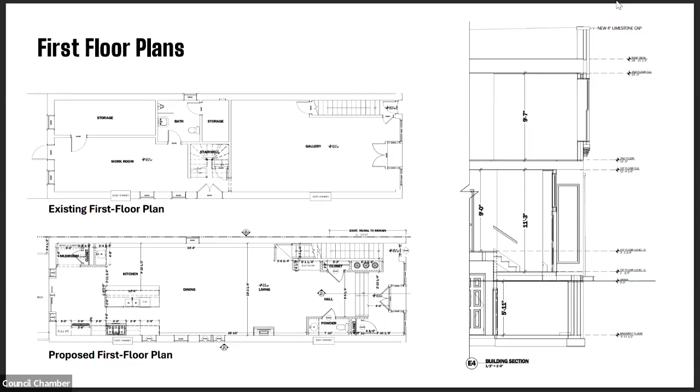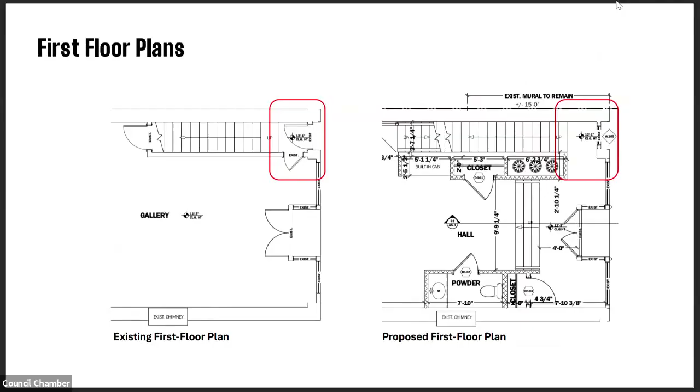Staff recommend that replacement of the door with a fixed panel will not remove any decorative features or craftsmanship important to the period of significance, and the design of the proposed panel will preserve a record that the opening was originally for a door, even if it's no longer operable.

In addition to the changes to the front facade, a new roof deck is proposed with an access stair, and new masonry openings are proposed at the side elevations. Due to the narrow side yards and the height of the adjacent buildings, these changes will not be visible from the public way.

Staff recommend approval of the project as shown on the drawings dated 1/29/26, with the condition for review of the new brick at the parapet as mentioned earlier.

Alderman Knudsen has reviewed the proposal and has no objection. The architect, Samuel Pavlovchek, and a representative for the owner, Alex Holt, I believe, are present and available to answer your questions.

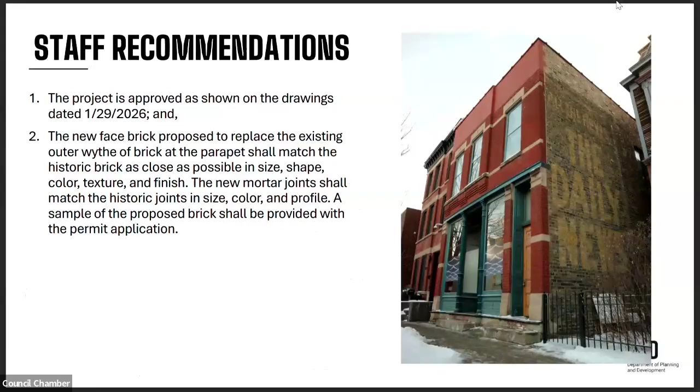Commissioner Fair: I think I heard you say it, but just wanted to confirm, for the new roof access for that pop-up, is that hidden from view by the adjacent building? Tyler: Yeah, and it's just limited to access to the roof, so even if it was visible, policy would allow it, but basically everything behind that front chimney is not visible.

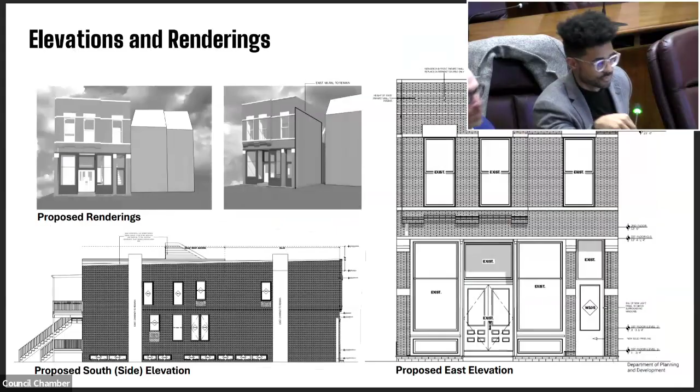Okay, and we've confirmed that. That's good to know, thank you. Thank you, any other questions, commissioners? And Commissioner Rubin.

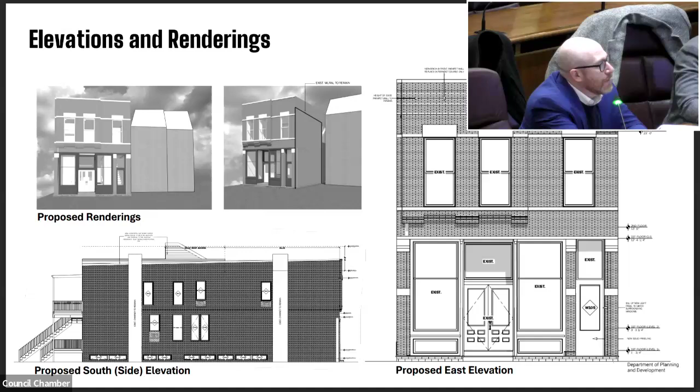Sure, that's fine. Hi, I think you mentioned, I don't know if you mentioned the cornice. I noticed the building next door had a nice little cornice on it. Did this originally have one on the parapet?

Yeah, so it had a pressed metal cornice that was removed before, and the area behind it was parged over before Roger Brown bought the building.

And anecdotally he wanted to bring it back, but there's a couple of options here. If a cornice were to come back, we would approve that as well.

Got it. But replacing the very clearly poorly matching brick is still one thing to address, right? Yeah, exactly. Sounds good, thank you. Good question. Any other questions?

If there are none, let's hear from the project architect if they're here.

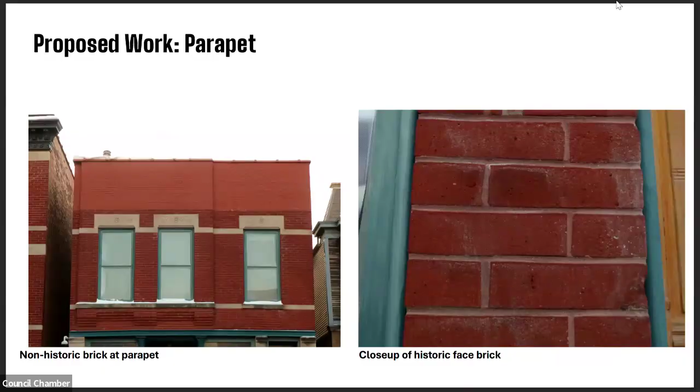Hi, good afternoon. Samuel Pavlovchik from Pavlovchik Architecture. I think the case was really provided in full. We were really trying to limit the amount of features that were changed in the building while still utilizing the best space within. The roof deck and access, again, were intentionally designed to be pulled back.

Even the roof deck itself does not extend all the way to the front parapet wall, so it's held back. So we don't need to worry about any new increase in height to the parapets.

Same thing with the residential first floor and the mention about raising up that floor to better utilize the basement space. We pulled that first floor in at the existing floor level so the entire existing front facade can remain while still making it usable space in the front and then being able to further utilize the basement below. Otherwise, I think everything else was pretty well covered.

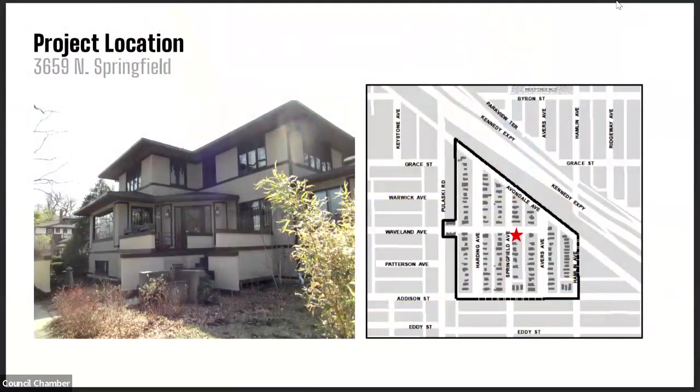Okay, thank you, Mr. Chairman. The subject property includes a prairie-style main house and is located on a corner block at Springfield and Waveland Avenues. The current two-car garage was reviewed and conditionally approved by the Permit Review Committee in 2021. The applicant has applied for a permit to remove and replace the front stair, porch, and wing walls and the 4 feet 6 inch high garden fence along the sidewalk. They are made of wood frame construction.

The deck and stairs are finished in wood decking. The walls are covered in beige cement stucco with dark brown stained wood trim. The deck is rectangular in plan with narrow stairs that go down to grade, and these elements have been designed and constructed in the same materials and architectural styles as the main house.

According to the architect, the existing decking and framing support is rotted and supported on inadequate foundations. The wall sections are damaged and have settled unevenly, causing chronic cracking, especially where they join the stucco walls of the residence, thus allowing water to damage both the deck and the house. The architect did consider just repairing the deck and stairs; however, in their opinion these problems would just continue and the settling issues would persist. Replacement would be required to install new adequate concrete foundations below, constructed with joints that allow for differential settlement.

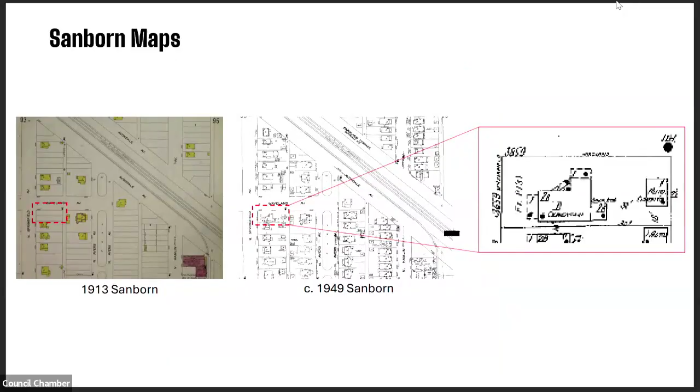In order to determine when the stair and fence were installed, staff researched documentary evidence of the property. The Sanborn Fire Insurance map from 1949, shown at right, shows a shallow porch and diagonal stair parallel to the angled entry. Historic photos with an unknown date but likely taken prior to 1975, based on the style of the street signs, show the diagonal stairs. In the 1975 photo, the stucco garden fence does not appear to exist, but the diagonal stairs do. A photo taken in 1978 still shows the angled porch, and all the photos mentioned, on that top row, were taken prior to the Villa District designation in 1983.

The Chicago Historic Resources Survey card has photos taken in 1997 and 2007, showing the current stair configuration and stucco garden fence. Staff was not able to locate permit records or other documentary evidence between 1978 and 1997 to determine when the stair was changed or when the fence was installed. Therefore, there is a chance that the current stair and fence were constructed after the district designation.

The architect documented the existing conditions of the stair and fence as shown on the permit drawings, and the proposed replacement will match the existing in design, size, materials, and location. The design and materials of the current stair and fence, while not original to the house, are consistent with the prairie-style main house. Staff recommend that the proposed removal of the existing non-historic stair and fence and replacement in kind will not have an adverse effect on the property or district as a whole.

The design, size, location, and materials of the proposed new stair and fence are compatible with the architectural features of the main house, and staff recommends approval. Staff recommend that the color and texture of the stucco on the new stair and fence should be compatible with the stucco of the main house.

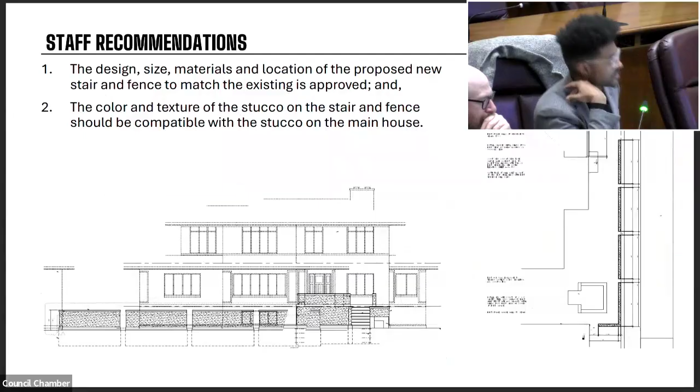Very good question, clarification. Any other questions? Seeing none, let's hear from the project team. The project architect, I believe, is here, Jerry McManus.

Good afternoon, Jerry McManus, Lineworks Limited Architects, the architect for this project. I think the presentation was pretty comprehensive. There is one item I would like to point out.

As best we can tell from the survey, that four-segmented garden wall or fence, whatever you want to call it, appears to be built either on or over the side property line. So bringing that down, the replacement, of course, would actually be built within the property line. I noticed there was a sentence in there about maintaining the same location, and I just want to differentiate there that we would be making a change there.

Otherwise, the owner's desire is to restore exactly what's there, the way they bought the home 6.5 years ago, and they'd like to make use of both the fence and the deck and the enclosing walls. They're perfectly happy to make it as compatible and matching to the existing residence. That's very important to them too. But the fact is that outdoor elements like that suffer in the weather and do need to be repaired or replaced every so often. So that's what we're hoping to do today.

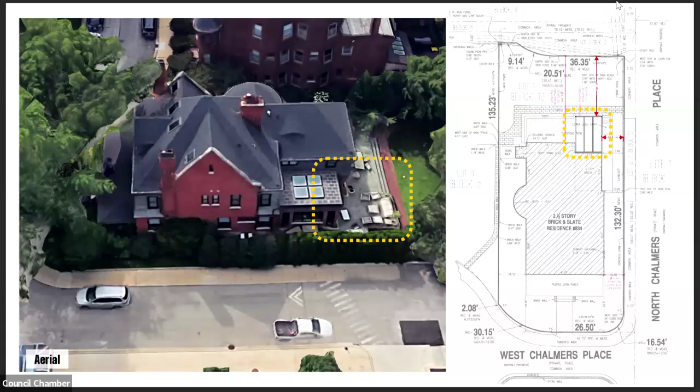There's an existing low masonry terrace at the rear of the building, which was expanded eastward when the addition was built. So now the applicants plan to add an open metal pergola onto the terrace, approximately 20 feet wide by 10 feet long.

So the new pergola will primarily attach to the non-historic rear addition, just below the eaves of the roof and the masonry terrace. It's proposed to be 10 feet tall from the patio and 12 feet 2 inches tall from grade, made of pre-finished aluminum in a dark color.

This pergola does not detract from the historic character of the property or district and will not damage or obscure any historic material or significant historic features. And because of that, staff recommend approval as proposed.

A letter of support from the Seminary Townhouse Association was also included in your packet, and I believe we have the homeowner here, Ned, if you have any questions.

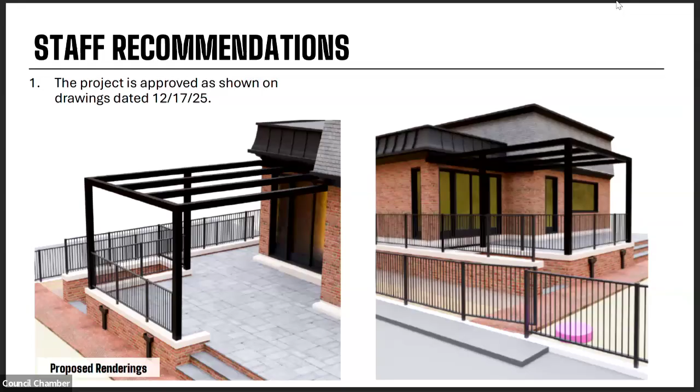Welcome. I'm Ned Villers. We've owned the home since 2013 and lived there since 2010. For those of you who know our community, it's its own landmarked district with a strict process that we have to go through to do anything. In this case, we've done that, and everyone is supportive and has no issues with it, so we hope you'll see the same.

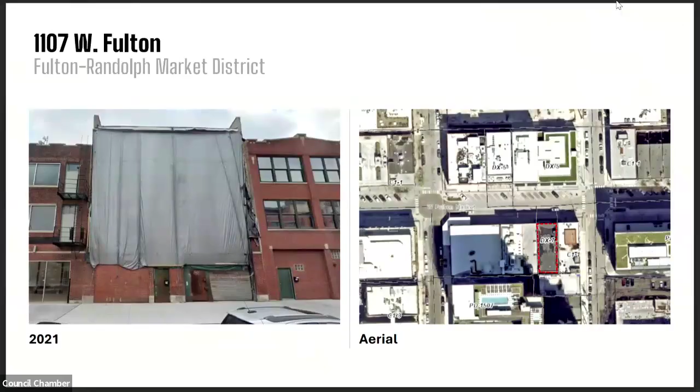Thank you, Mr. Chairman. The building is located mid-block on Fulton between May and Aberdeen Streets. The Fulton Randolph Market District, designated in 2015, conveys Chicago's importance as a wholesale market and meatpacking area that includes a significant number of manufacturing, warehouse, and meatpacking buildings that exemplify the importance of industry to the city's economic development.

The majority of the buildings were designed with a utilitarian aesthetic that placed priority on functionality, sturdy construction, minimal wasted space or material, and clearly expressed structure with the use of large windows, vertical piers, thick masonry walls, and limited architectural ornamentation. The subject building is located adjacent to 2 to 3-story buildings.

The front facade was demolished prior to the initiation of landmark designation of the district. Since the existing building has lost its historic facade and no longer conveys the historic and architectural character of the district, the subject property was identified as non-contributing. The proposed changes therefore should be reviewed pursuant to the criteria for new construction, additions, and alterations to non-contributing buildings and the Fulton Randolph Market District design guidelines.

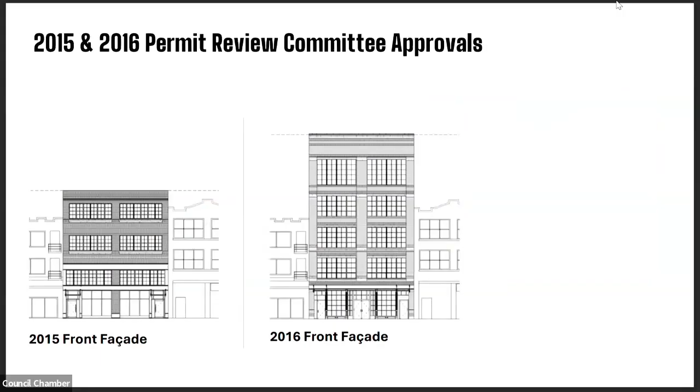Facade replacement projects were reviewed by the committee 3 times before, in 2015, 2016, and 2022, but none of the work moved forward. The 2015 proposal was a 4-story building with 2 bays and an overall building height of 49 feet. The 2016 proposal was for a 5-story building, also with 2 bays, but an overall building height of 70 feet 5 inches, though it was conditionally approved to have the fifth floor set back so the massing and scale of the building is more compatible with the historic context of the district.

The most recent PRC-approved proposal in 2022 was for a 4-story building with 3 bays and no additions, shown at left. Historic preservation staff reviewed and approved the permit drawings in December 2022. However, that permit has since been voided.

Sometime between 2022 and 2025, a structural steel frame was constructed on the front facade, which includes 2 columns on each side and 1 center column. This 2-bay layout does not match the 3-bay layout that was approved for permit.

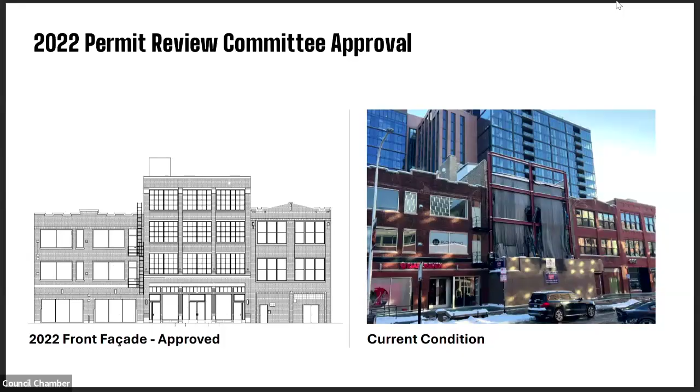Historic preservation staff reviewed permit drawings for this project in July 2025 and issued corrections recommending how to revise the design to meet the Commission's criteria for new construction and the Fulton Randolph Market District design guidelines. In December, the drawings were resubmitted to Landmarks for review. Staff issued corrections reiterating the same comments from the last review cycle, and noted that since the design is significantly different from what was previously approved by the PRC, it would need to be reviewed again at a future meeting. Since then, staff has been in contact with the property owner, who has ultimately decided to present his project as proposed with no changes to the committee for review and decision.

The current proposal is a 4-story building with a 3-story addition. The building height from grade to top of parapet of the principal facade is approximately 52 feet. The overall building height from grade to the top of the penthouse roof is 94 feet, and 104 feet to the penthouse machine room. The proposed floor-to-floor heights are 15 feet 9 inches for the first floor and 12 feet for the second, third, and fourth floors.

The front facade is proposed to incorporate 2 bays with 16-foot 4-inch wide by 9-foot 4-inch tall windows on floors 2 through 4, with a narrow masonry pier in between. The new windows are proposed to be divided light steel windows with operable awnings. The scale of the window openings is larger than what is found in the historic buildings in the district, and staff recommend reducing the size of the window openings to be more compatible. This could be accomplished by raising the sills and widening the vertical masonry piers. Alternatively, the front facade could be divided into 3 bays as previously approved by the PRC.

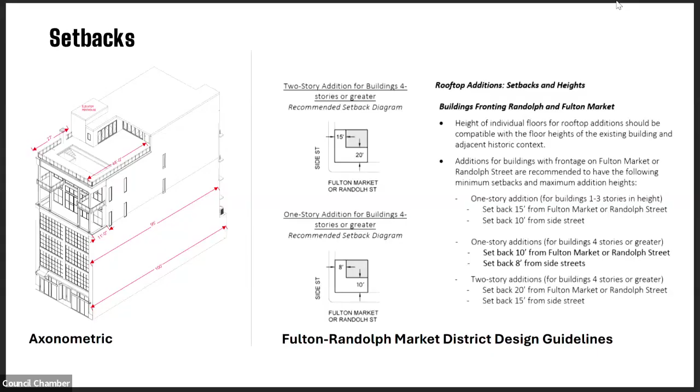The Fulton Randolph Market District design guidelines provide flexibility to add space through rooftop additions. Buildings that are 4 stories or greater may have a 2-story rooftop addition constructed, provided that they are set back from the primary facades along Fulton a minimum of 20 feet. These setbacks are intended to maintain the scale of the immediate context and overall district. The height of the individual floors of the rooftop addition should be compatible with the floor heights of the existing building and adjacent historic context.

To support the proposed building height, the applicant provided several addresses and their estimated heights of taller buildings within the district, which were all included in the packet for your review. In summary, a number of these properties are located on larger sites that are not comparable to the subject property. There are several properties of similar context, such as 1106 West Fulton, a new construction project approved to be 5 stories at 66 feet high by the PRC in 2019, located mid-block with a 50-foot street frontage and directly across the street from the subject property, making it the most relevant in context.

215 North Aberdeen is a 5-story contributing building at 77 feet high, located mid-block about a block away from the subject property. 1114 West Fulton is a 4-story contributing building at 51 feet high, located mid-block. And 312 North May is a 6-story contributing historic building at 88 feet high that fills half of the block, located about a block away from the subject property.

The new construction examples provided were approved by PRC but have different contexts than the subject property, as they have a larger footprint and are located on a corner lot, making them not comparable to the subject building. This includes 1045 West Fulton, which was approved to be 12 stories high at 138 feet by the PRC in 2019 and was part of a larger development that filled half of the block.

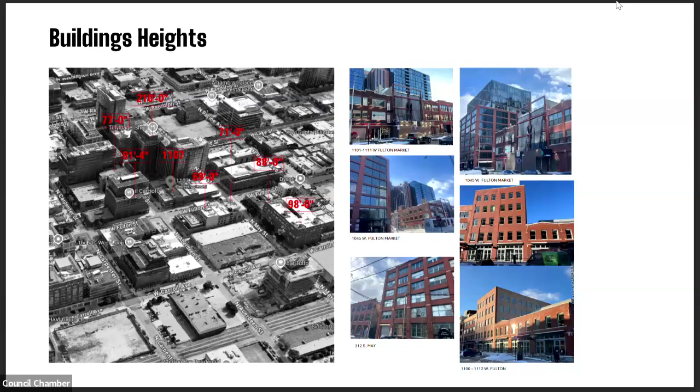The last example provided by the applicant is 1118 West Fulton, a 5-story building at 71 feet high, located at the corner of Fulton and May Streets. However, this is a non-contributing building, so we cannot take that one into consideration.

Taking all this into account, the scale of the immediate historic context of the contributing buildings is important to maintain. The proposed floor-to-floor heights of the addition, which are taller than the other floor-to-floor heights on the building and context, the setback of the 3-story addition, which is not consistent with the district guidelines, the open structure and projecting balconies proposed at the 5th and 6th floors, which are not characteristic of the district, as well as masonry opening sizes proposed on the 2nd, 3rd, and 4th floors of the primary facade, are not compatible with the historic character of the district.

Staff recommend options that address these issues, such as a 4-story building with a 2-story addition set back a minimum of 20 feet from the front facade and individual floor heights compatible with the adjacent historic context, or a 5-story building that does not exceed 66 feet in height with a 2-story addition set back a minimum of 20 feet from the front facade and individual floor heights compatible with the floor heights of the adjacent historic context.

These proposed options would provide the number of stories in building height that are compatible with the immediately adjacent context and would be in keeping with the historic and new construction examples provided that are similar in scale and siting with the subject property.

The front elevation of the 5th and 6th floors is proposed to be fully glazed, with side elevations clad with metal panels. Staff recommend that any cladding materials on the rooftop incorporate the color of the window frames, and that metal panels be a dark neutral color with a matte finish that recedes into the background.

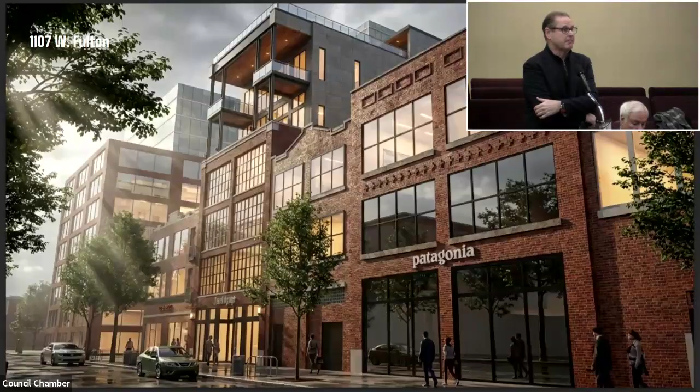So the idea is, you can see that it emphasizes the parapet line across the street of West Fulton. And the idea with the steel was that it minimizes the design and kind of retracts back. If you look, there are 4 steel columns going up that are maybe 12, 14 inches wide, so it's a very minimal structure.

It does get reinforced, as Joyce said, with the balconies and that top parapet. And we would obviously work with, as one of the comments was about the railing on top, to make that disappear. Similar to what we did on the fifth floor, that parapet acts as a railing.

So the floor is a little deeper in there, and that's why we came up with some of those larger floor-to-floor heights, as well as the sixth floor floor-to-floor height, because there are structures on the roof that we needed about 4 feet deep for. So while it might come off as 15.9, the real dimension inside is 12 feet, which is very typical in that district.

So I think that follows the design. I'll just go through a little response on the comments. Our goal really was to fill in the site with a modern interpretation of the Fulton District kind of industrial building. Those large windows, those 2 bays, we did look at a 3-bay system, but it actually reinforces the verticality of the building as opposed to horizontal.

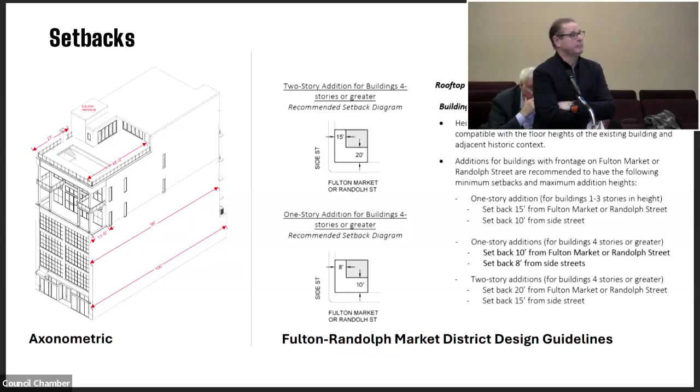But like anything, we could keep looking at things and always try to refine it. I mean, that's what we're doing here.

I have a question just for dialogue. Commissioner Fair, are you saying that maybe an acceptable approach would be to expand the street wall, not let it look like balconies up there, but take the street wall all the way up and go for the mass, versus two different approaches? Right now, I think what gives pause is that it looks like an old historic structure with a non-conforming addition.

Yeah, absolutely. Right now it's like a complete form, but it could read as new construction working within the guidelines—a true street wall—versus looking like an addition to a non-conforming structure. Yeah, I think we're on the same page.

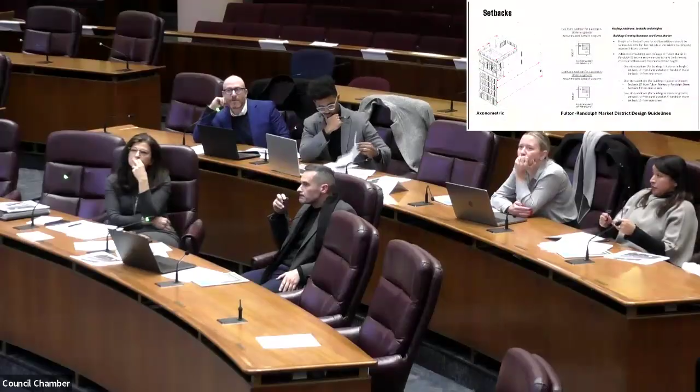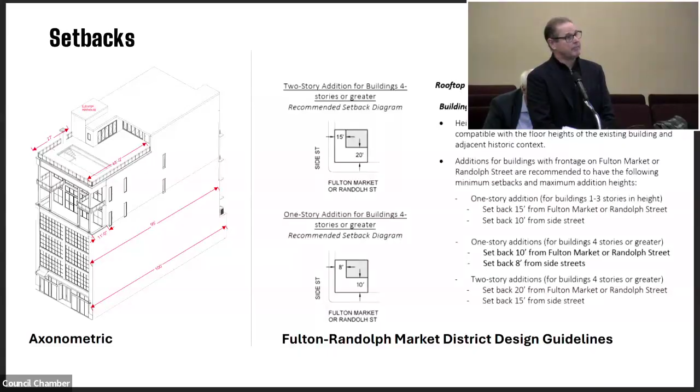About damaging the buildings next to it by taking down what remains of the historic structure that isn't visible? Yes, they're built like common walls—I think this building was there first, from what I remember looking back. So the two party walls are integral to the adjacent buildings. You'd have to take them down and build them back in sections. On the sidewalls, the rear wall has to come down, and the front facade's already gone. So the masonry on those two common walls comes through, but we'd have to redo the face brick, obviously.

But that would still bring it back to the permits review committee. Even if it was all brand new construction, it's still in a historic district, regardless of whether there's pieces of the original building there or not. It wouldn't end up sidestepping this commission. Right, okay, right.

I don't know that I have a solution here, but just addressing the massing at the front - I think what you did ends up being the reverse. It's drawing attention to the volume that's there. The wall isn't apparent, so you end up with the beams and the balconies, and even though it does break it up, what you're noticing is the void of space, which acts like an existing building because you've built lines around it, which ends up being distracting from what you're doing. It would stand out as a non-compatible addition no matter which way you do it, which is concerning. What is the square footage of the two?

Is it 2 or 3 residential units in the addition? It's potentially just one residential unit. That's all one residential unit? Yeah, okay. But we've looked at it both ways - in the permit we went in as 2 units, but it potentially is going to be for 1. I don't remember the net square footage, but it's 40 by 80, so minus I think it ends up being maybe 38, without the use of the 2 floors.

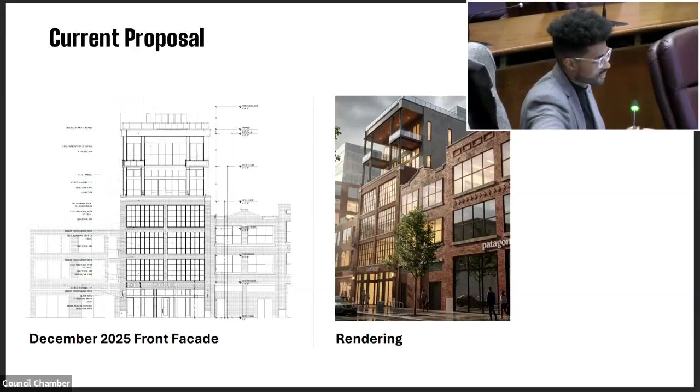Anyone else? You have additional questions, or we could go to public comment and come back to discussion? It was just more discussion. Okay, I mean, I feel like we're trying to talk our way through this, right? There's no... so we can say no comments. We're in discussion, yeah, okay. Unless - we have no public comments. There's no public comments, we're in discussion.

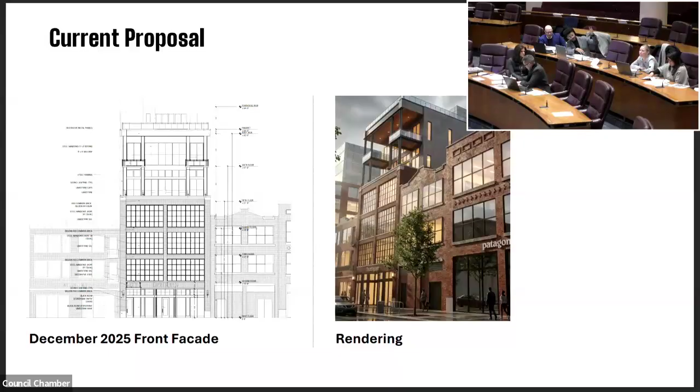Our primary responsibility isn't so much with the amenities of the building, although we acknowledge and are sensitive to that, and we know you want to make something attractive that offers all those sorts of things. But I look at this as a puzzle, and the pieces are set - one of the constraints is the treatment of those two upper floors. One option identified is at the corners facing the main street: do you build those up so it reads more solid and not like a completely foreign add-on that's been dropped on it? Or are you able to cut back those balconies and that structure so it steps back and reads more in line with additions to that building? I'd like to see a solution go in that direction.

I think it feels like we're in a bit of a stalemate right now. And I hear the restrictions or challenges you all have, but we really want to make sure we're not introducing something that's not in alignment with everything else in the district. Even the example you shared is what we're trying to push you all towards. Well, I mean, it's steel, glass, brick.

That's essentially Fulton Market, so I guess what I'm reading in what you say is that it's the use of it that's potentially pushing it in different ways than it's there. But I don't know about that - I feel like it's very deliberate to that neighborhood, it wouldn't be in probably any other neighborhood. I think the material palette, absolutely, is in kind. I think the use though, particularly where we're not in alignment, is that the steel at the upper two floors is argued to be creating a step-back effect. We're saying no, that mass reads, especially with those balconies and that concrete balcony projecting out - it just reads as a solid mass.

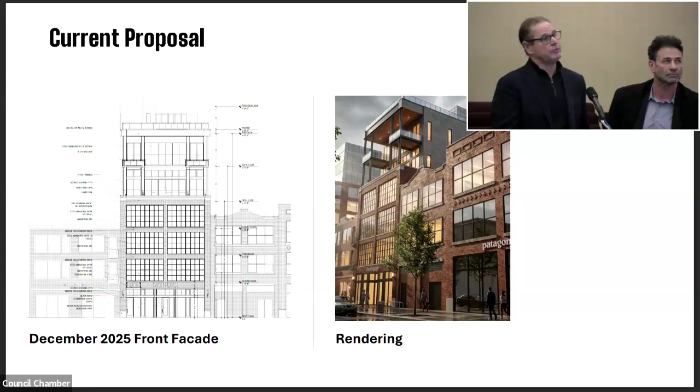It's interesting to look at that from that perspective. If you add mass and solid to it, does it actually help the top two floors? I think Eamon wants to say he's the owner.

Hi, my name is Eamon Hamid. I'm the owner, and thank you all for taking the time to review this. Thank you, Joyce. I've owned this building a long time.

I think John has done a nice job trying to incorporate what your guidelines say: don't imitate, but come up with something creative that blends in without imitating what's there historically. I feel, and a lot of the community feels, that this building does exactly what it's supposed to do in that area. It incorporates the industrial meatpacking look with steel, panels, and glass of the district. The district has evolved, and we now see buildings that are creatively and architecturally beautiful while also fitting the neighborhood. A lot of new construction follows that design, following the guideline of not imitating but complementing. I think the first floors do that, and the addition does as well.

Everybody's saying how heavy it is or this and that, but I think a straight-up building would look terrible. If I were on the commission, I wouldn't want something just coming straight up. I think the steel that goes up shows the meatpacking district's look, but also lets your eye go through it instead of hitting your face with a blank wall.

318 North Carpenter does the same thing. Now it's a bigger building, bigger footprint, but with the zoning we're allowed to do this. This is what we got the zoning approved for, as Nick said.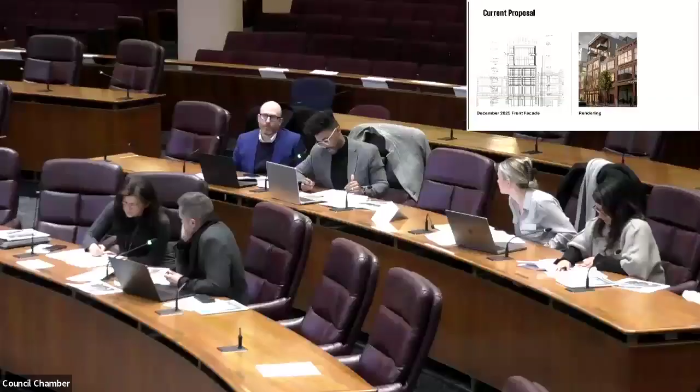Does that make sense? Yeah, the 5th and 6th floors, I believe, are about 15 foot 6 inches for floor-to-floor heights, whereas the 2nd, 3rd, and 4th floors are 12 feet floor-to-floor. So the first thing I'd say is getting the 5th and 6th floors' floor-to-ceiling height in alignment with the 1st through 4th floors.

Yes, while also meeting the overall building height requirement for the street, which was 66 feet. So they're doing that technically already, unless they change the design further on and it all becomes a single wall at the front, at the property line, I should say. That makes sense.

The 66 feet - well, I guess what's the 6-story height currently? If we look at the 6-story height, what's that currently? 82 feet, or really 84 feet to the top of the parapet. So that's quite a bit of reduction. Is that to the penthouse? The penthouse is 94 feet, but the penthouse is set back.

So what we're talking about in terms of height is connected to the design of the building. Our feeling has been that those balconies, those four columns, all read as a mass contributing to the street wall. So the next part of the recommendation would be that has to be revisited, to either be redesigned as a full setback - does that 11 feet get chopped and you rearrange the amenities as such - or if the entire street wall reads more consistent for all 6 floors, then you've got the question of how you adjust the entire floor-to-ceiling height for the building to get within that 66 foot overall height, which I don't think would make anybody too excited about how you now squish 6 floors into 66 feet.

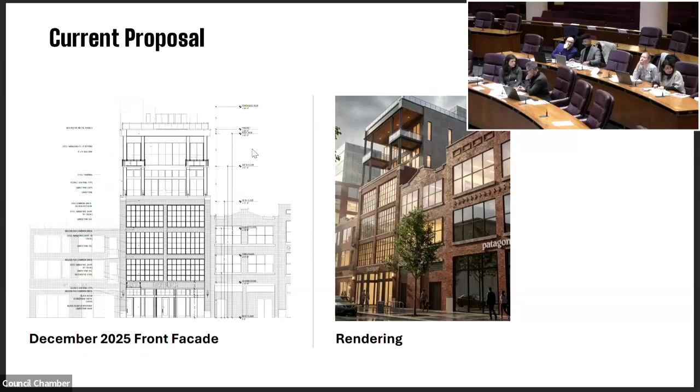Understood. There's also, regarding the heights, a little misleading thing I mentioned - there's some interstitial space on the roof deck that looks like it's another 4 feet higher. Is there a couple feet? Obviously that's an easy fix, probably.

Is the commission saying to bring up the sides and leave the front like it is? I'm open to doing that. I'm not looking to do anything you don't want - I think you suggested strengthening up the sides so they go straight up. I'm fine with that, bring that forward. And if you feel like that doesn't work, I'd be more than happy to do that.

I'm working with the architect to see if he's okay with that, but there's a building at 318 North Carpenter that does just what you're describing - just as tall as this, sits next to a 2-story historic building, right abuts to it, and does exactly that, except it takes the recommendation of putting up the sides straight up and leaving the front open. It's 318 North Carpenter.

I don't even think it has to be solid. Something needs to happen, because the structure is quite prominent - those columns break away from the rhythm of the 1st through 4th floor, so there's something different happening if that rhythm continues.

If we could look at that as a solution, I can work with the architect, or let him work on it - I think that's a very good solution, especially if it can be some kind of material that isn't just solid, like windows or something like that.

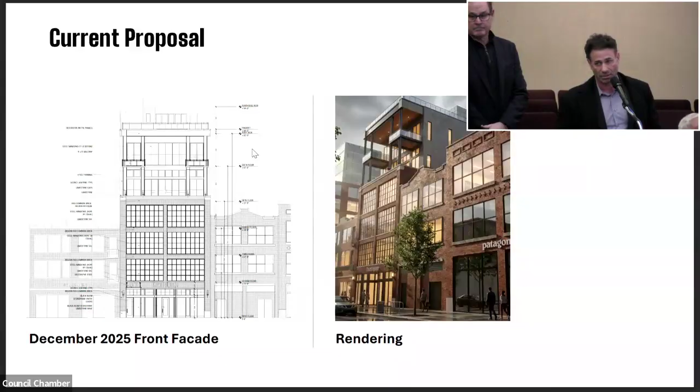I think the execution of how that's done is something we would definitely want, if not us, the staff to be able to review. That we will see.

Who wants to try to summarize that? That's a succinct recommendation. Yes, please, thank you. I will attempt, and you could correct me.

We need to modify the staff recommendations. The project does not need to come back to the commission, but there will need to be some adjustments to the design that would be reviewed in consultation with Commissioner Fair as soon as possible, so there's no delay in your permit process.

Condition number 2, I'll start there. It seems like that condition is eliminated entirely, as well as condition number 3. I think material samples is a standard process, so there's nothing wrong with that one, right? That remains. I think the decision on the cladding materials is going away, number 5.

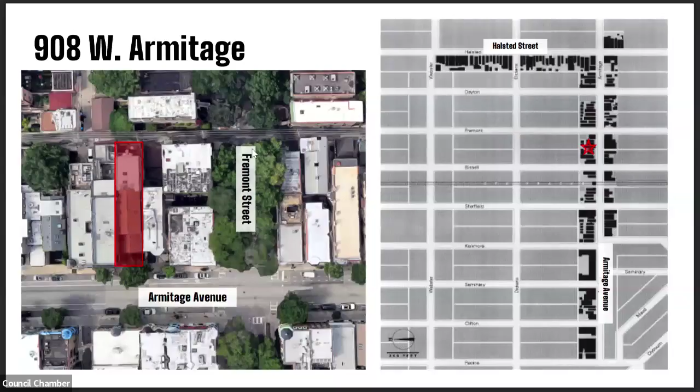Yes, thank you. The subject property is a 2.5-story masonry workers' cottage, mid-block between Bissell Street and Fremont Street. Workers' cottages were historically entirely residential, and for this building the top 2 floors are still occupied as a residence, but the first floor has been converted to commercial use. The new tenant for the space reached out to staff about desired modifications to the front facade in order to increase visibility for their new store.

The building is a typical example of a masonry workers' cottage, commonly found throughout the district. Per the designation report, several buildings, including the district's oldest buildings dated from the 1870s and early 1880s, were built as small-scale residential buildings, predominantly cottages and 2 and 3 flats. Built during the immediate period of post-Chicago fire reconstruction and expansion, some are constructed of wood, while other examples are built of brick.

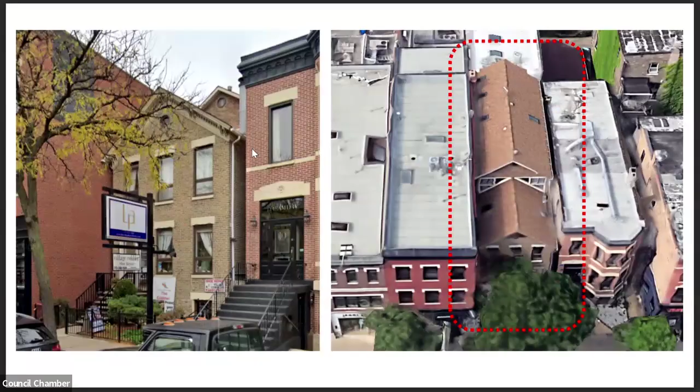While no permit was found for the subject building, it exhibits all the modest characteristics of a workers' cottage built between 1875 and 1880. It is listed as non-contributing in the report's building catalog, but this is likely due to a 3rd-floor addition that was added to the building in 2002, predating the designation. Although the original double-hung windows have been replaced, the historic masonry openings have all been retained, and besides the rooftop addition, staff feels the building maintains a high level of historic integrity.

The front facade features typical residential style punched masonry openings with 3 bays that align on all floors. This is a common condition within the district, with similar window groupings found at 1018 West Armitage and 952 West Armitage, among many others. The original double-hung windows were replaced sometime in the past with aluminum windows that do not match the proportions or operation of the original.

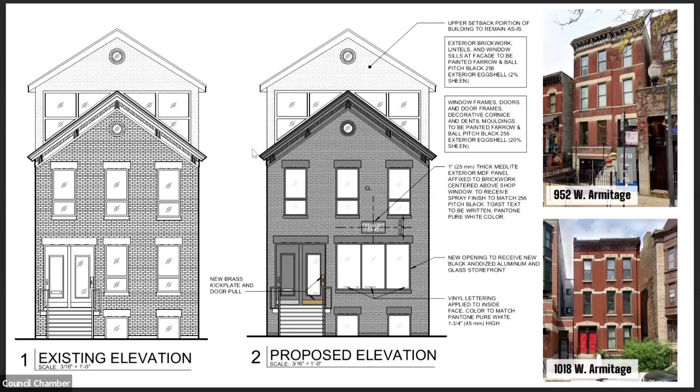The applicant would like to merge the 2 windows adjacent to the door on the raised first floor to create one large storefront window to increase visibility for the retail store. This would involve the removal of the historic masonry in between the windows and also the original sills and headers.

Although many buildings within the district have storefronts, they are store and flat type buildings, which historically featured large glass storefronts in the first floor retail spaces, with more typical punched masonry openings on the residential levels above. There are also examples in the district of residential buildings that had additions built to the front for commercial use, but these alterations were all made prior to district designation. The applicant has included several examples of these in the submission that you received last week.

This building in particular was historically residential in use, and while some residential buildings were designed with wider first floor windows, such as you can see at 918 West Armitage, which aligns all the way up with the residential windows historically, the subject property always featured 3 bays of single double-hung windows. Enlarging the masonry opening detracts from the original character of the cottage and would involve the removal of historic fabric, including the decorative carved lintels.

Staff recommends that the proposed modification would be an adverse effect to the building, and the historic masonry opening should remain. Typically, when windows are being replaced, any new windows need to meet historic preservation guidelines and reintroduce the original configuration if inappropriately modified in the past. In this case, because the existing windows are not historic and the majority of the windows are proposed to remain, staff recommend that the 2 first-floor windows may be replaced with fixed picture windows in order to increase visibility.

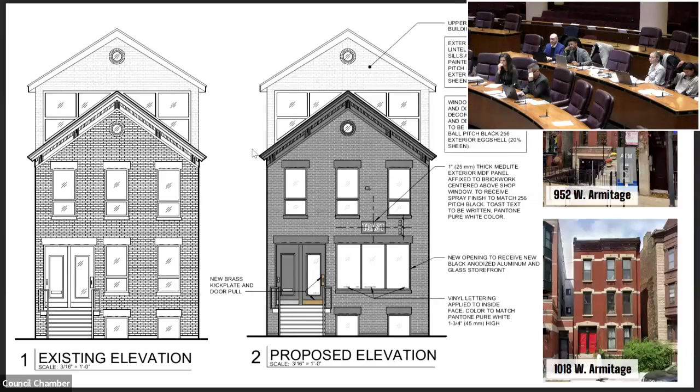It's something that can be generally approved at the staff level. It's a small sign that fits within guidelines. We would have it be attached to mortar joints, and vinyl graphics, especially such small ones in the windows, would be fine too. Okay, thank you. Okay, any other questions, commissioners?

Hearing none, let's hear from the project architect, I suppose. Excuse me, do you mind if I go first? I'm the tenant. Oh, sure. Okay, just introduce yourself. Yeah, sure.

My name is Brenda Mansour, and I am the head of retail expansion for Toast, the tenant at 908 Armitage. I know you may not be familiar with the brand, so just wanted to let you know that we were established in the 90s in the UK, and opening in Chicago is a big part of our retail expansion strategy in the US. We're planning to open 20 locations. We have 6 for New York, 2 elsewhere in the US, and we have 7 more doors opening this year.

The mission of Toast is to make thoughtfully crafted clothing and objects that are classic and stand the test of time. We also produce events in our stores and demonstrations for customers to learn about craft and handiwork. So creating a brand experience that is visible and translates to a customer is very important for us, especially as we see Chicago as a very important market for our growth and for the health of our overall business.

Our stores typically inhabit historic buildings, both in the UK and in the US. In the West Village, we have a space that's from the 1800s. I know the store would be about 100 years old. This building was built in 1917. We actually seek out historic buildings to inhabit because we want to retain them and respect them and honor them. We felt that in this submittal our primary objective to improve the visibility from the street to the storefront was well balanced with the design of the building. We maintained the lintels and overall tried to create a more historic appearing facade versus imposing a completely modern window system, which could have been possible.

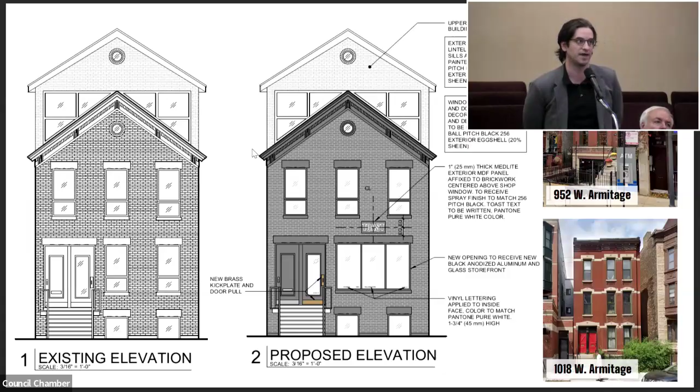And I do think there's a good handful of examples on Armitage Street, on Halsted Street, within the landmark zone, where windows have been expanded. So I do understand the reasonings. I understand and appreciate Emily's extremely thoughtful work here. But I do wish that the commission would consider the window opening especially, and consider the paint color, because it's such a representation of Toast brand, and we want them to succeed.

We want commercial businesses to succeed in Lincoln Park. We want them to succeed in Chicago. And as a landlord, I want to see them succeed. They've made a 10-year commitment to this project. They're very committed to the neighborhood, committed to Chicago. And I'll say my piece.

So I'm here to support my tenant. Renda's done an amazing job. She's worked through the city. She's really tried to do everything the right way.

We painted the building, and we could have gone into permit and said, okay, we're just going to do interior work, or we could have just asked for the windows, but we wanted to do it the right way. So we went in, we said, we're going to include the paint color, even though we had already done it. We could have taken that risk, and we chose not to, right? Because we wanted to do it the right way.

We're owning that mistake. And I just want to ask the commission to consider the window, consider the paint, and we're here to respect your decision. But I did feel that I wanted to stand up for my tenant, support Renda, who came in from New York, and support them as a business and their commitment that they've made to Chicago. So thank you very much.

Appreciate it. No, thank you. Thank you for being here, and thank you for giving us all that background.

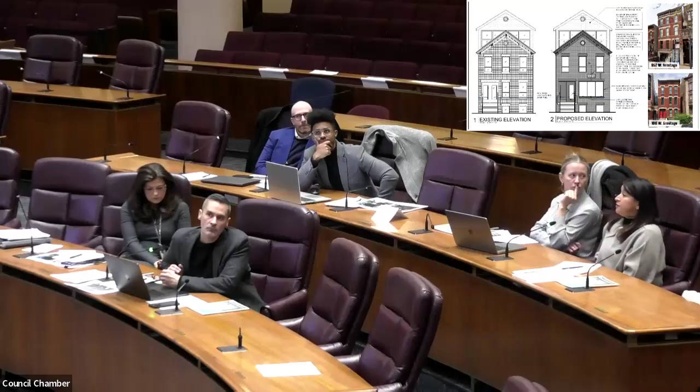No, I mean, it was well thought out. I think that because of the existence of the other painted structures on the block and the way that so many window storefront systems have been modified, we were under the impression it would be approved, and there had been some conversation about the process with landmarks before. So we came into the deal with the assumption that we would be able to open the windows based on what was visibly available to us to compare it to.

Would it help, and I know this is not what you're proposing, but would it help to get more length in the windows at all? To lower the sill if you had to stick with the configuration of the worker's cottage that it is?

I think this is something that maybe Austin can help with, but I believe more glass would be helpful, though I think the way the windowsill is built, it's not that much more space, right?

I am Austin, registered representing DXU Architects here. Obviously a little bit more storefront in any case, going down to the floor, would be helpful for visibility. But again, if we're modifying the exterior masonry, we really don't want to touch much of that sill. We would have to replace the lintel, the decorative lintel that reads as masonry. We would want to keep that character. We've drawn it graphically there to keep in mind. It's not unlike what's already above the existing two entry doors there. So that's the intent, to keep the lintel as is, give the middle bay some visibility. That will really help because we've got a lot of store fixtures in there that you're going to want to see from the middle bay.

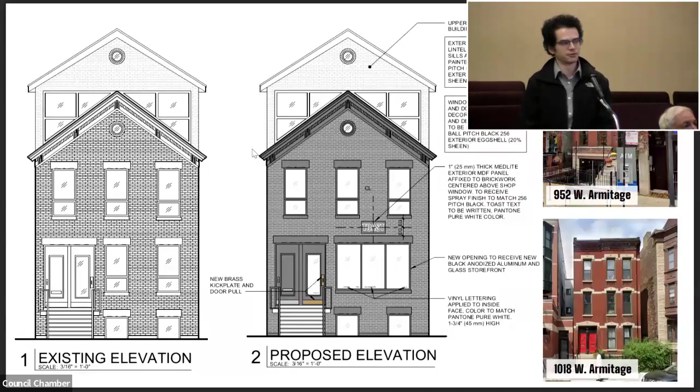Brenda, I don't know if extending the storefront windows down all the way to the floor would get us anything, but I do think that middle bay, if we're going to push for anything, is something I'd recommend you guys consider.

The other thing I would mention is a lot of retail spaces, you really don't want to walk upstairs. This was a challenging space to lease, frankly, because of the stairs, since most retailers don't want to go up a flight of stairs. It makes it more challenging, especially being a little higher up, it can be harder to see inside the space. So part of the idea of adding the picture frame window was making the retail space a little better and more normal with the rest of the block, especially given the stairs, which make it more challenging for retail space.

Back to final discussion, commissioners. Is there any other final discussion or points? We'll see the recommendations. Okay.

My position hasn't changed too much. I do hear the desires for this to best provide the visibility for the commercial function. But the viewpoint and horizon of this commission has always inherently been beyond the tenants, and a modification like this sets a precedent where a tenant would have, respectively, good reasoning in many situations to make modifications. To me, this just opens the door where we'd be bending the guidance that we have. So I don't have any comfort with it. I do hear you all out on the points you're making.

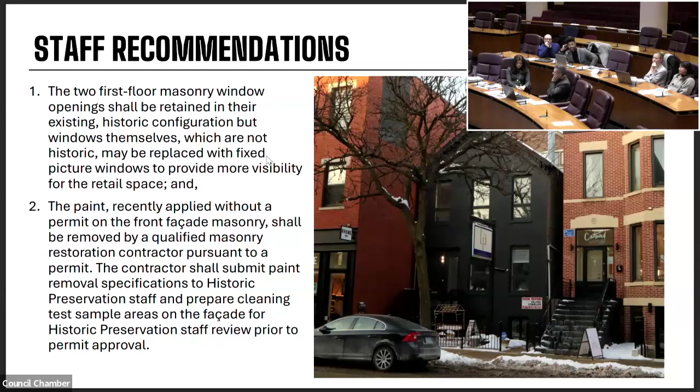I do think, given that you're looking up to this elevated first floor, there could be some value to extending that window down. If I were in your shoes, the floor space you're getting to frame a view to your merchandise, maybe a mannequin or so, maybe that's the approach — really framing that view to whatever specific merchandise or styling is there. Within the building itself, I'd encourage you all to explore what can be done at the interior to draw eyes. I understand it's a challenge to compete and make sure you're getting your merchandise displayed, but making a permanent modification to the architecture of the building, one that would set a precedent for the rest of the district, is something I couldn't see myself getting behind.

Okay. Any other final points, commissioners?

I might also add that the timing is interesting. Mr. Ward Miller would probably agree that Chicago has been looking at its stock of workers' cottages lately, and unfortunately we've been losing them left and right to all kinds of modifications. So this building type is very much in the zeitgeist in Chicago. I have no doubt Toast would be very successful here. It's a gorgeous building, and having a precedent of going into historic neighborhoods and bringing your brand in there, I think, is a super cool thing to be doing.

But I'm going to land in the same place. I want to see the stewardship of this building continue. I hope Toast is there for 100 years, but for the next 100 years, should you leave the building, I'd want to see it in its form. I think being able to say you're expanding your brand, coming into Chicago and valuing this workers' cottage type, which is an endangered type, and that it's important to the brand and something you want to preserve — maybe it created some challenges in terms of display, but it's still a commitment you wanted to make. It's going to look so good in Chicago right now, and draw a lot of good attention to the brand. So I know it's a compromise. I'm trying to look at the bigger picture of this moment, the precedent we'd set as commissioners for what's happening to this type, but in an odd way you could leverage it and get a lot of good faith. Just something to consider.